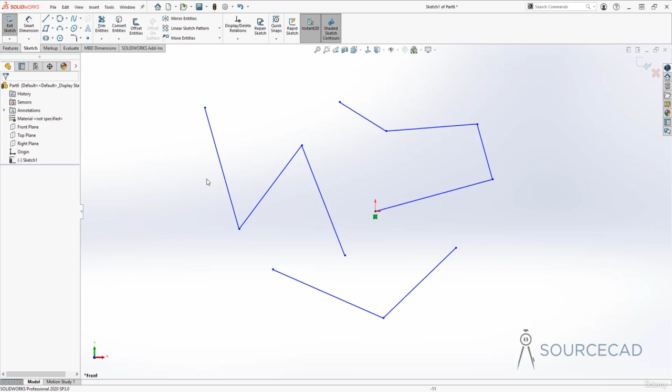So just double click and the command will exit, and also the same command will start. So once again, I'm back in the line command. I can again start making my line. Now if you want to once again exit and start the same command, double click, and there we are. Now once again, I'll select it all and I'll delete it.

Now I'll go to the line tool again, and this time let's look at the properties palette here. So on the property manager, we have several tools here related to the line command. Now what we have selected here is called as sketched in the orientation panel. So when you make anything, it will be made as you prepare this sketch. So it will just move it in any direction.

But if we constrain it, so I'll go to line, and now if I change the orientation to horizontal, SolidWorks will now make line only in 0-degree direction, which means you'll only end up with horizontal lines. And after every line command, the command will exit. So you can make several horizontal lines, but you cannot make it in any other direction. No matter how high or how far you move away from that line, you'll still have the horizontal line.

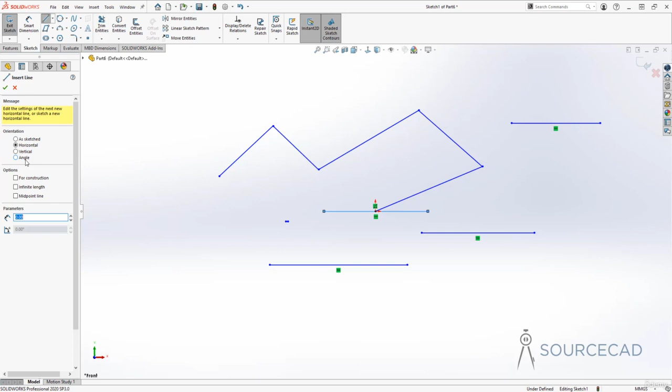Now to exit out of this, click this green check mark, and then you'll move back to this property manager from where you can select the different orientations. So you can go to as sketched or maybe vertical. Now your lines will be vertical. So now you can only make vertical lines.

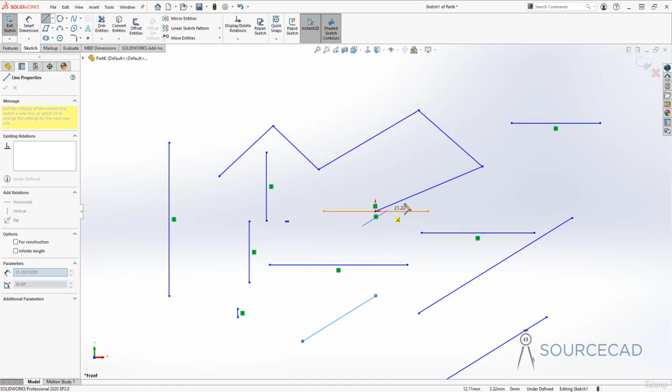Similarly, I'll again click here, and now I'll go to angle. And in this case, you can specify an angle and your line will remain restricted to that angle. So I'll type in 30 and I'll click, and look at this. Now we have lines exactly at the angle of 30 degrees. All right, I'll press escape to exit out of this, and I'll just delete it all. So I'll select it all, I'll delete it. This was not selected, so I'll just click on it and delete it.

Let's go to line tool again. Now we have seen the orientation option. Let's go to options. Now in the options, we have the first option called for construction, and this will let you make lines basically which are construction geometries. So I'll select this checkbox and I'll make a line, and now you'll end up with this construction line.

Now you can use these construction lines for center line of geometries, or maybe for circles and arcs, and you can also convert a simple line into construction line. So if you have a simple line, and I'll press escape key, and if you want to convert it into a construction line kind of like this, then you can select the line and go to the options here in the properties manager and click on this for construction checkbox, and your line will be converted to construction line.

Now we also have another kind of line here. I'll go to the line tool and select the infinite line. This will let you make an infinite line, like this. I'll click at a point, and now I have horizontal, vertical, or any inclined line that you can make. So I'll make a vertical one, and then I'll click here and make a horizontal one. Now these are infinite lines.

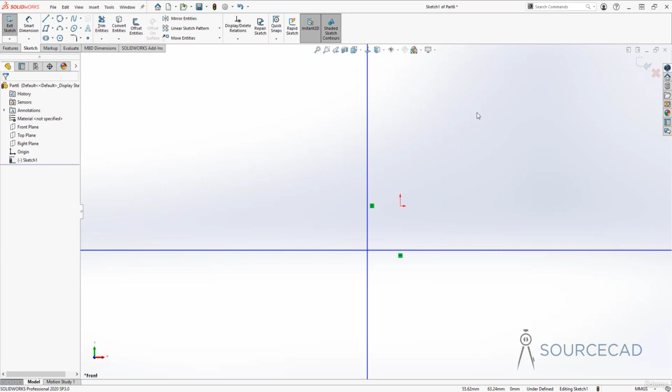Now I'll delete all of these. In this case, you can make a window to delete these, but what about this? You cannot make a window large enough to include it completely because these are infinite lines. For this case, you can make a crossing window. When you click towards right and move your cursor towards left, you get this crossing window. Anything which touches the window will be selected.

But in case of selection window, let me first make a couple of lines to explain that. I'll press escape. Now the selection window is this. I'll click at a point and move my cursor towards right, and what I'm getting here is a selection window. Everything inside the window will be selected. As you can clearly see, these three lines are the only ones selected. This line, which is partially inside and partially outside the window, won't be selected. So that's the selection window.

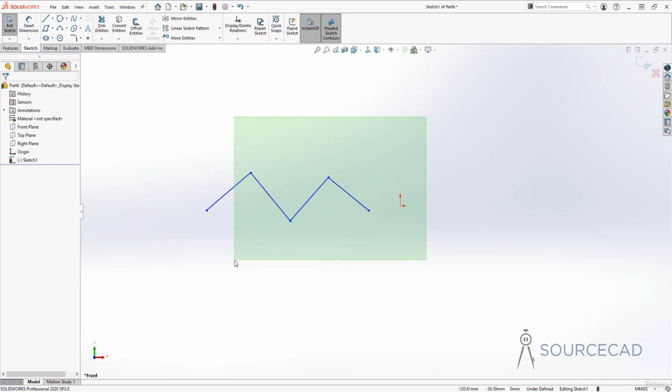But in case of crossing, I'll press escape key, click at a point and move towards left now. Now I'm getting a crossing window. I'll make a similar kind of window where these three lines are completely inside. This one is partially inside and partially outside. Still, everything will be selected, because in case of the crossing window, all the lines which are inside as well as on the boundary will be selected. So now I can select and press delete key.

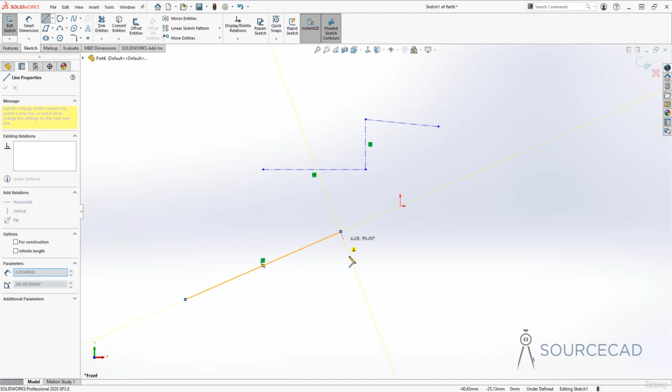Now these tools, the construction line, the simple line and the midpoint line are also available directly on the line tool. So you can go to line tool and select the center line as well from here. Just expand the line tool, select center line, and now you have a center line tool here. You can also select the midpoint line. That's the midpoint line. I'll select it all and delete it.

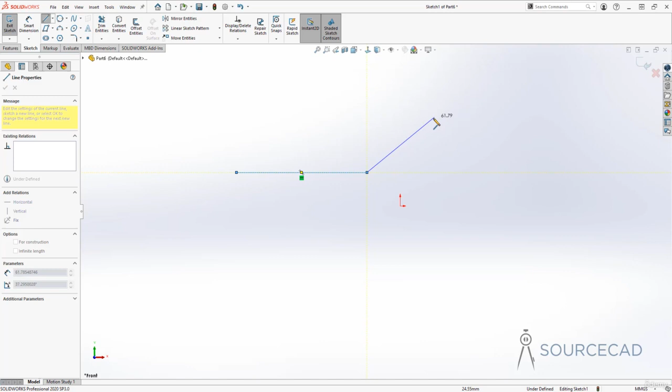Now finally, you can convert your line tool into arc very easily, like this. I'll start the line tool, click at a point and make a simple horizontal line. Again, it will start the line obviously, but if you want to convert it into arc, all you need to do is go back to the same point, but don't click, just go back to this point and move it out again. This time what we have is an arc. The way you move out this line will decide the type of arc which you will get.

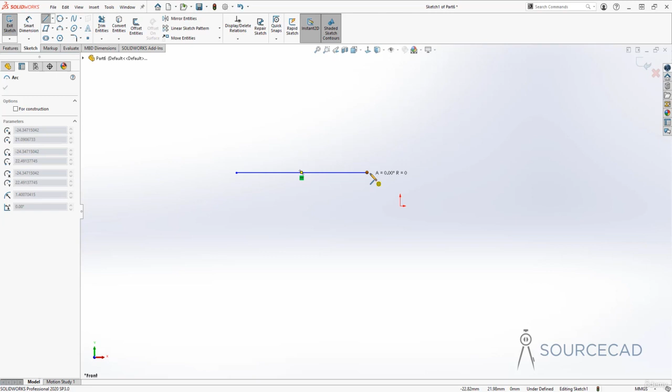I'll move this cursor back to this point and this time start from this point, and look at this, now I'm getting an arc in this direction. Again, I'll move here and start in this direction and the arc is here. If I move exactly here, what I'm getting is this. Now if I move here, I'm getting a tangent arc. So depending on the direction, your arc will change. Once you've made your arc, it's back to the line tool.

And that was all about creating lines in SolidWorks.